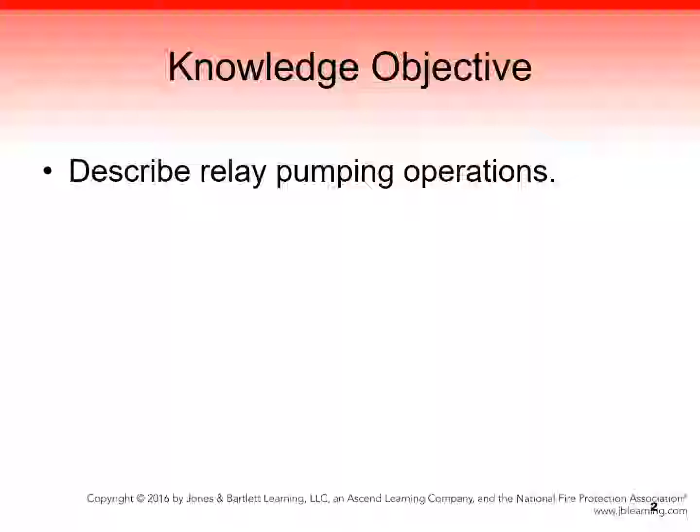The knowledge objective that we're going to cover in this class is to describe relay pumping operations.

Establishing an uninterrupted water supply is one of the most important objectives for any incident commander, or IC. In areas where municipal water supplies are not readily available or static water supplies are not available close to the incident, the IC must establish a plan to obtain an uninterrupted water supply. This can be obtained through a relay pumping operation, a tanker shuttle, or a nurse tanker operation. Again, as mentioned earlier, these operations can be labor and equipment intensive. Appointing a water supply officer to oversee them will ease the burden on the IC.

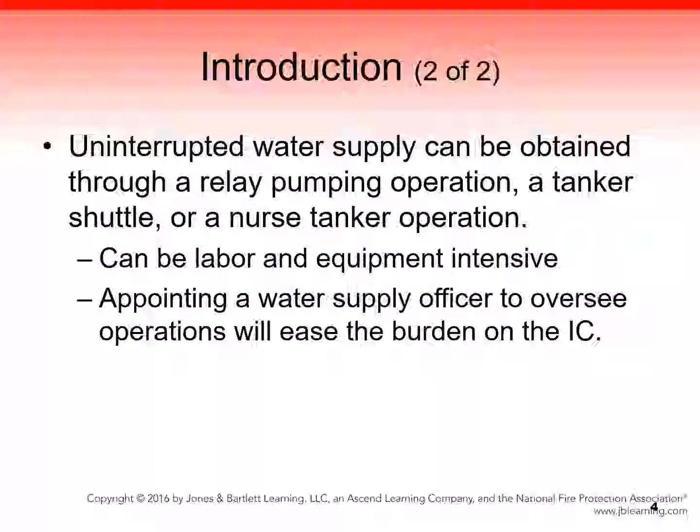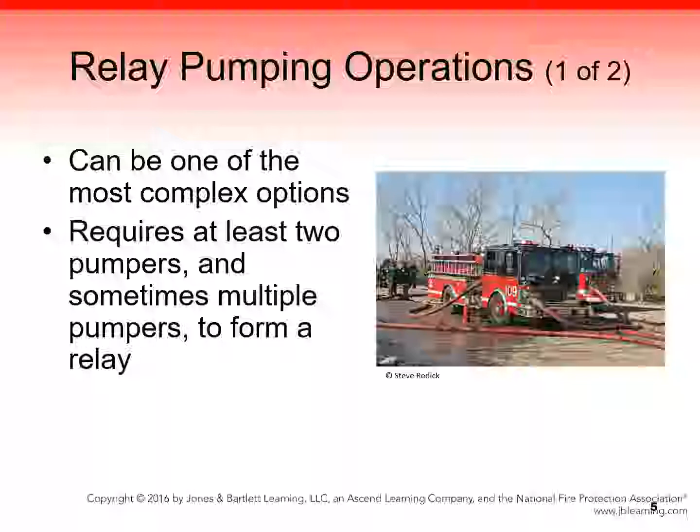A relay pumping operation can be one of the most complex of these options because it requires at least two pumpers, and sometimes multiple pumpers, to form a relay system, as shown in figure 13-1 in your text. Water is pumped from a water source, hydrant or static, through hose under pressure to the apparatus engaged in fire suppression efforts. Relay operations can be as simple as one fire pumper at a pond or lake and the other fire pumper at the fire scene, or as complex as the use of multiple pumpers to supply water over long distances to a fire operation.

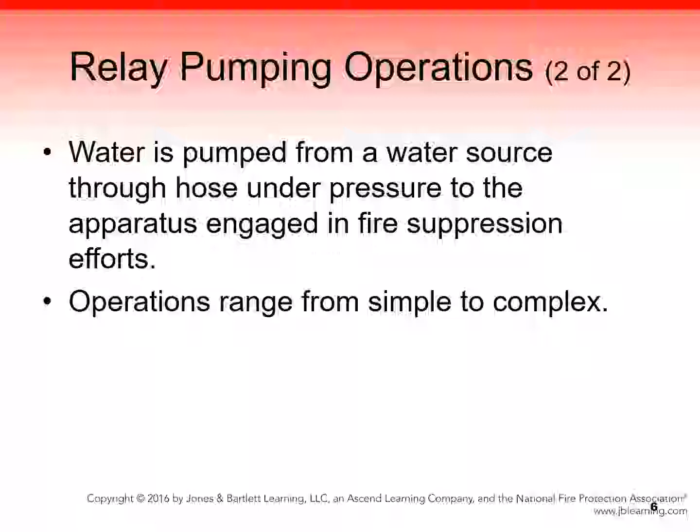Let's discuss the components of a relay pumping operation. To establish any type of relay, you must have a minimum of 2 fire pumpers, hose lines, and personnel. One fire pumper is located at a water source; this is called the source pumper. The other fire pumper is positioned at the fire scene, and this is called the attack pumper. Any other fire pumpers positioned between these two apparatus to maintain flow pressure in the relay system are called relay pumpers.

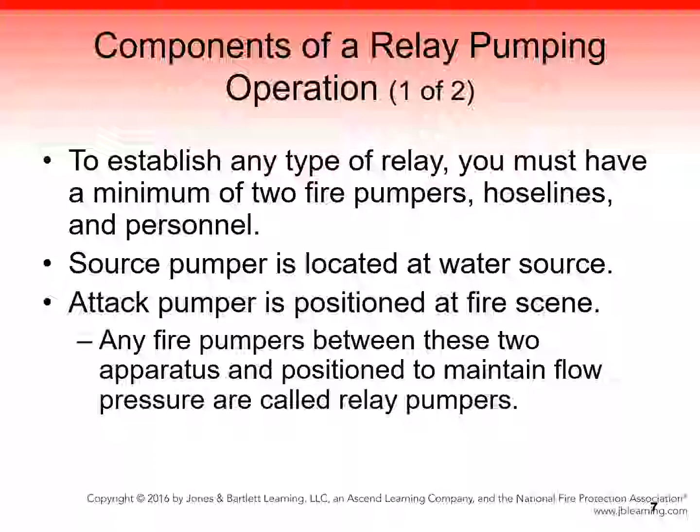2 medium-size or large diameter hose lines are used to supply water in this scenario. Relay pumping operations will demand the use of personnel as they are being established, especially at the source pumper. Once the relay is established, generally the only crew member who needs to remain with the fire apparatus is the driver-operator, as long as the area around the fire apparatus is safe from traffic flow. If it is not, a second member should be left behind to assist the driver-operator. All other crew members should be used as resources if the IC chooses to do so.

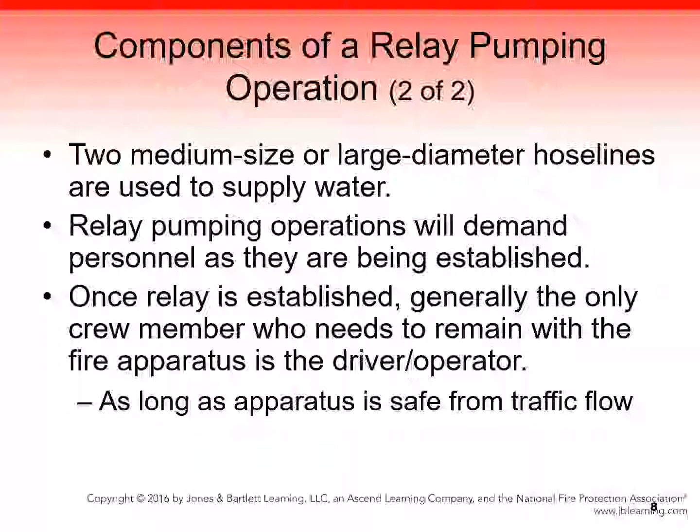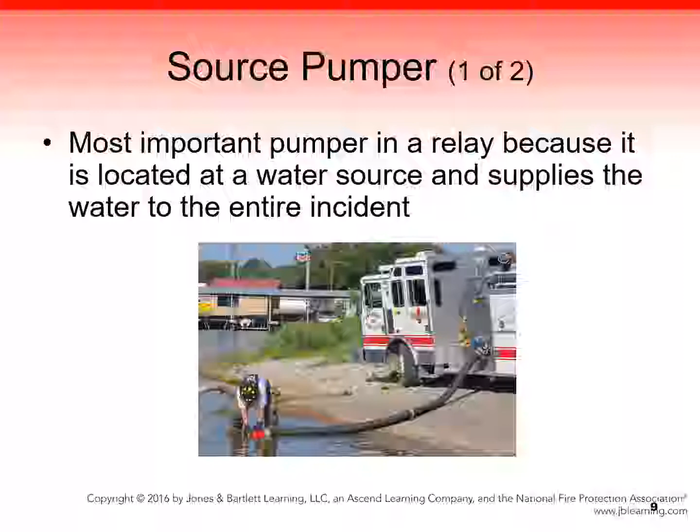The source pumper is the most important pumper in a relay because it is located at the water source and supplies water to the entire fire incident, as shown in figure 13-2. The source of the water is either a fire hydrant or a static water source. The source pumper should consist of the largest fire pump of the units assigned to the relay pumping operation, thereby ensuring that it can provide the maximum amount of water.

For example, if the source pumper has a 1,500 gallon per minute pump, it should be supplying the 1,000 gallon per minute pump on the relay pumper. This setup ensures that the 1,000 gallon per minute pump can be supplied with enough volume of water to meet its capacity if needed. If the reverse were to be true, then the larger pump could not be supplied to capacity because the incoming flow would be less than 1,500 gallons per minute.

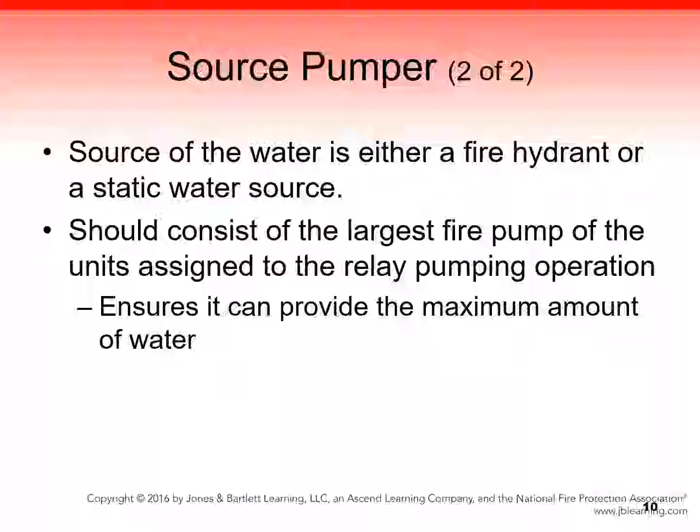The attack pumper is usually the first unit at the scene of an incident. Its operation will dictate how much water will be needed based on how many gallons per minute the fire attack requires. If the attack pumper cannot establish its own water supply, it may lay a dry supply line into the scene to be filled later by a source pumper or a relay pumper, as shown in Figure 13-3.

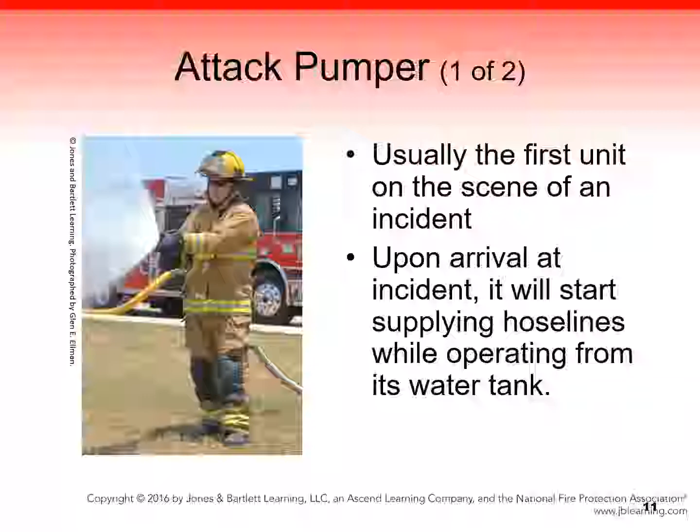If the attack pumper is being positioned in an area that has limited access, it is generally recommended that a supply line be laid down from an open area to the limited access point. Another responding engine should then complete the connection and provide a water supply to the attack pumper. Upon its arrival at the incident, the attack pumper will start supplying hose lines while operating from its water tank.

It will then switch over to the relay supply line when it's ready. This process presents a challenge to both the driver-operator and the IC.

The fire attack is initially limited by the capacity of the attack pumper's water tank. The attack pumper will be able to support additional hose lines only if the incoming water supply from the relay operation will support them. For example, if the relay operation is supplying 300 gallons per minute of water, the attack pumper will be able to provide slightly less than 300 gallons per minute of discharge flow to the hose lines.

The amount of flow available is valuable information for the IC and must be identified so that the IC can make tactical adjustments to the overall strategy until water supply can be improved.

Ultimately, the attack pumper serves as the workhorse at the incident, as it provides water to all of the hose lines that are attacking the fire. If the attack pumper does not have water, then no attack on the fire can take place.

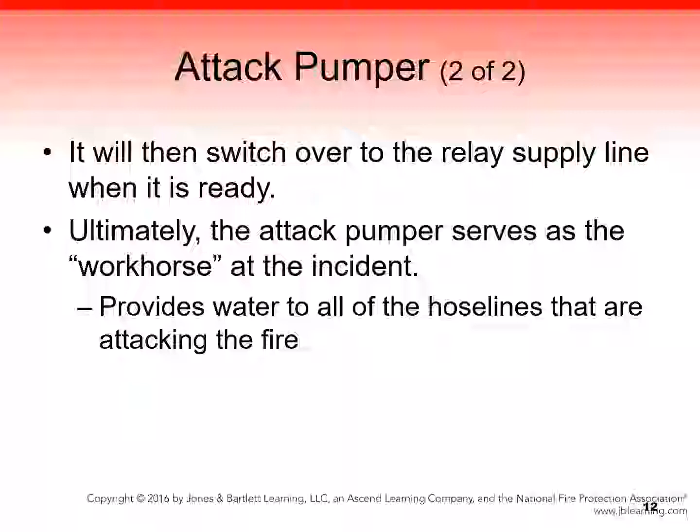Relay pumpers are the fire apparatus that are placed in the middle of the relay pumping operation, as shown in Figure 13-4.

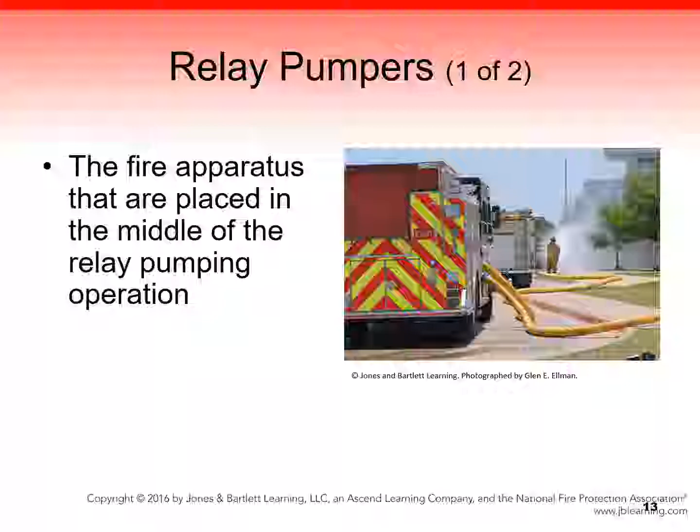They obtain their water from the source pumper and increase the pressure to the next fire pumper in the relay. These pumpers act like booster pumps to maintain pressure throughout the length of the relay. A relay pumper cannot increase the volume of water being pumped. It can only increase the pressure, because the source pumper provides the flow quantity based on the volume being discharged by the attack pumper.

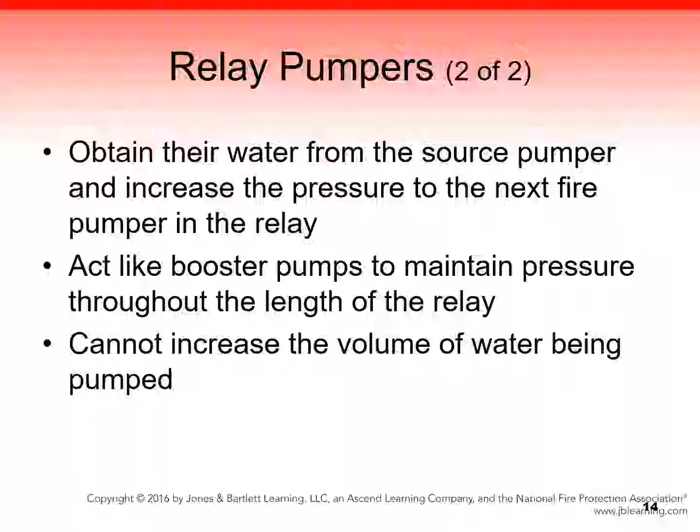For example, if the source pumper is flowing 800 GPM (gallons per minute) at 80 psi, the relay pumper will receive a flow of 800 GPM, but due to friction loss in the hose lines, the water will be at a pressure of only 50 psi. The relay pumper will increase the pressure back to 80 psi and continue to flow at 800 GPM to the next pumper, which will then increase the pressure again to overcome the friction loss until ultimately the 800 GPM flow reaches the attack pumper.

Let's talk about equipment for relay pumping operations. Fire hose is the primary path of travel for water to get from one fire pumper to another in a relay operation. The hose can consist of single large diameter hose, which is 4, 5, or 6 inches in diameter, or multiple medium-sized hoses, which are 2.5 or 3 inches in diameter.

Single lines of LDH, by their design, have a very low friction loss variable: 7 psi when flowing 1,000 gallons per minute in a 5-inch hose line. Compare this to a single 3-inch medium hose line, which has a friction loss variable of 21 psi per 100 feet for just 500 gallons per minute.

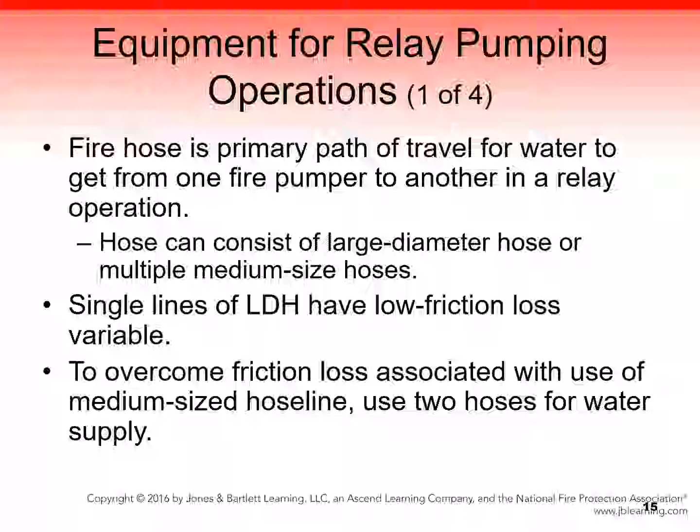To overcome the higher friction loss associated with use of medium-sized hose lines, as I was just discussing, it is recommended to use 2 hoses for a water supply. To avoid this issue altogether, it is highly recommended that LDH be used whenever possible.

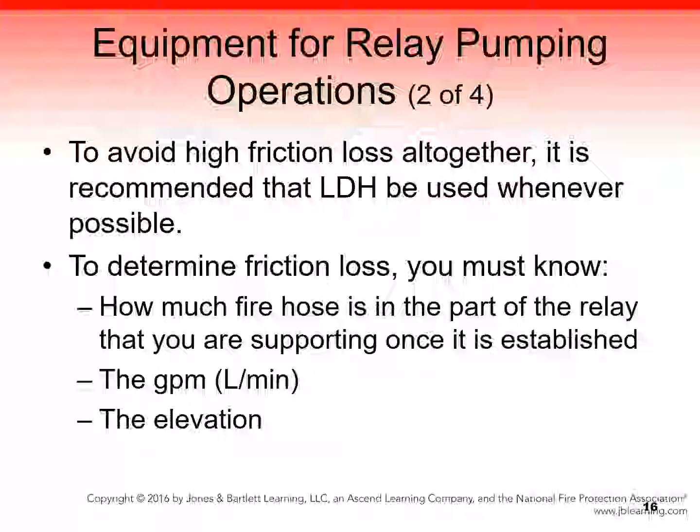To determine the friction loss for a relay pumping operation, you must know: A, how much fire hose is in the part of the relay that you are supporting once it is established; B, the gallons per minute; and C, the elevation. You can then calculate the friction loss for your part of the relay operation and adjust your discharge pressure accordingly.

Relay pumping operations may require some other standard equipment, such as hose adapters to connect hoses with different types of threads, a Siamese hose which merges two medium-sized hose lines into a single LDH, a manifold which splits a single LDH into 2 or 3 medium-sized hose lines, and reducers which connect larger single hose lines with smaller single hose lines.

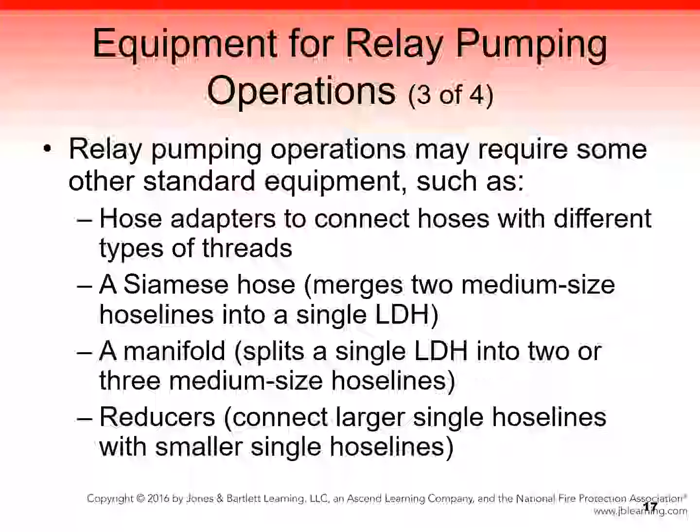No matter which size hose you're using to supply water from the source pumper, each pumper in the relay operation and the attack pumper must be equipped with an intake relief valve. Most modern pumpers are equipped with these valves at the time they are built. Older pumpers may need to be retrofitted with external valves.

An intake relief valve will prevent the incoming water supply from reaching excessively high pressure, which might damage the pump and possibly interrupt the relay operation. Relief valves discharge the excessive pressure through a port located on the valve.

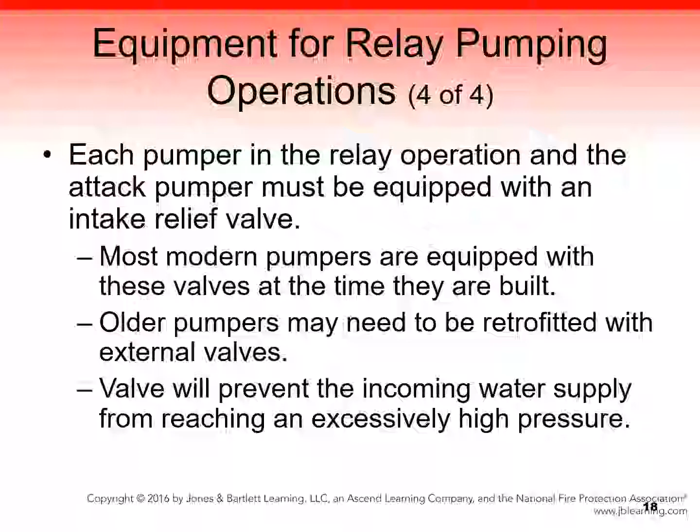Personnel for relay pumping operations is what we're going to discuss now. A safe relay pumping operation requires that you have adequate personnel for the operation. A minimum of 2 crew members should be assigned to each fire pumper if the pumper will be exposed to moving traffic and other hazards around the fire apparatus.

As the driver-operator, it is your responsibility to operate the pump and manage the intake and discharge pressures. The second firefighter is responsible for managing the area around the fire apparatus so as to ensure the safety of the members by monitoring vehicle movement around the fire pumper and warning you of possible dangers.

Let's discuss preparing for a relay pumping operation. The length of a relay pumping operation is primarily determined by the distance between the water source and the incident. The amount of water required by the attack pumper and the size of the supply line can also affect whether a relay pumper is required and, if so, how many of these apparatus are needed.

As discussed earlier, small diameter supply hose lines decrease the flow capacity and increase the friction loss. Generally, LDH represents the best option for relay pumping operations, as we discussed earlier as well. Given that supply hose is critical for successful relay pumping operation, it must be in place before water can be flowed.

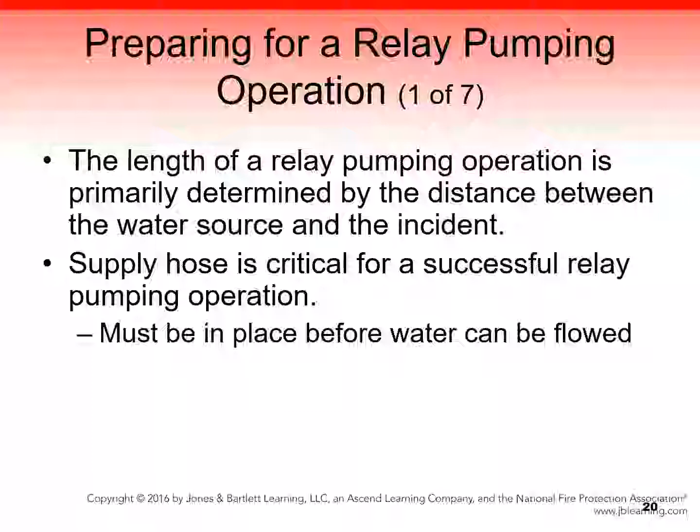A forward lay is a supply hose line that is brought to the scene by a fire pumper from the water source, as shown in Figure 13-5. An engine that connects to a fire hydrant and then proceeds to the fire scene is an example of a forward lay.

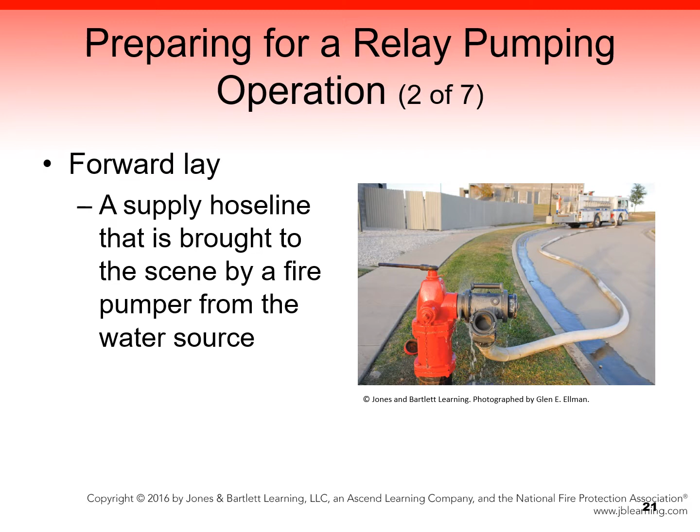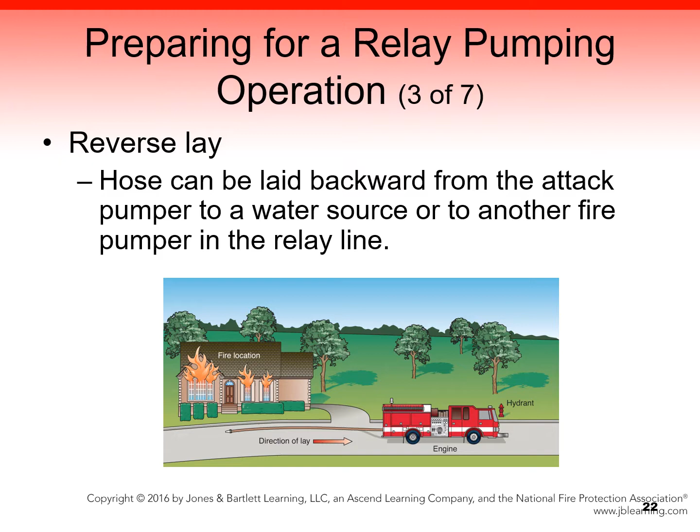Hose can also be laid backward from the attack pumper to a water source or to another fire pumper in the relay line. Both of these are examples of a reverse lay technique, and this is shown here on your video and in Figure 13-6 in your text.

Alternatively, one fire pumper may lay hose into the scene while another fire pumper lays hose out from the first engine's coupling to the water source. This approach is called a split lay and is shown in Figure 13-7.

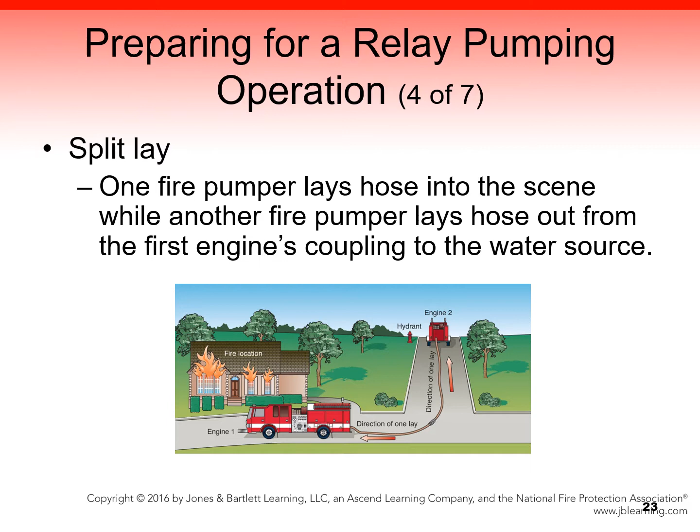Another type of split lay involves laying a line from an open area to the pumper where there is limited access and having a second pumper connect that hose and move to the water source.

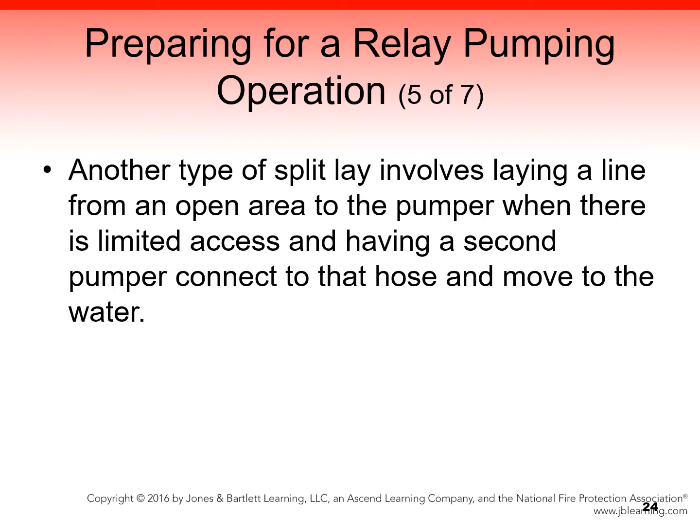Once you have the hose in place for the relay, you can determine whether a relay pumper is needed by calculating the amount of friction loss for the length of the hose in the hose lay. If the discharge pressure will exceed 80 psi for LDH or 175 psi for medium-sized hoses, a relay pumper is needed to boost the water pressure.

Although a good rule of thumb is that no relay operation should extend for more than 800 feet, it can be longer as long as you keep adding pumpers. Maintaining relay operations over a shorter distance will keep the pump discharge pressure manageable while ensuring the proper quantity of water flows to the attack pumper. Keep in mind that the attack pumper's needs are the deciding factor in terms of the pressure and flow necessary.

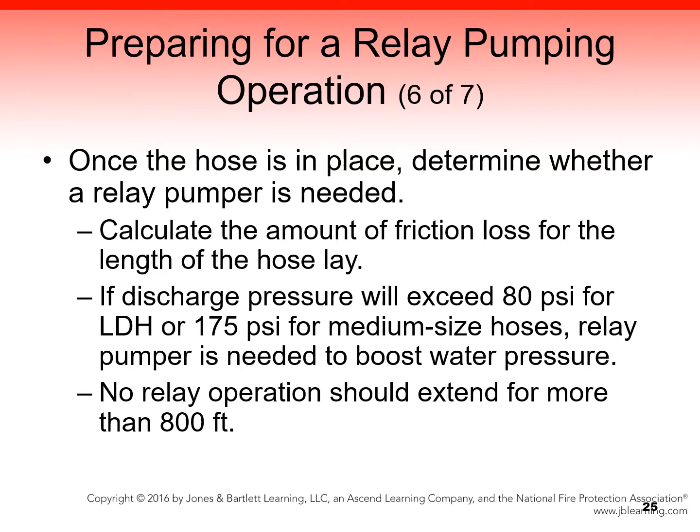Adapters, reducers, manifolds, and appliances may also be used in relay pumping operations. When two fire pumpers use different threads on their couplings for hose, adapters allow for both pumpers to connect to the same hose. When the size of the hose lines differ, reducers are needed to connect the mismatched lines together.

Manifolds greatly increase the effectiveness of relays by allowing one LDH to supply two to four medium-sized hose lines with water. When an LDH is split into multiple hose lines in this way, however, the overall friction loss increases due to the compression of the water back into smaller vessels, in addition to the flow restrictions within the appliance itself.

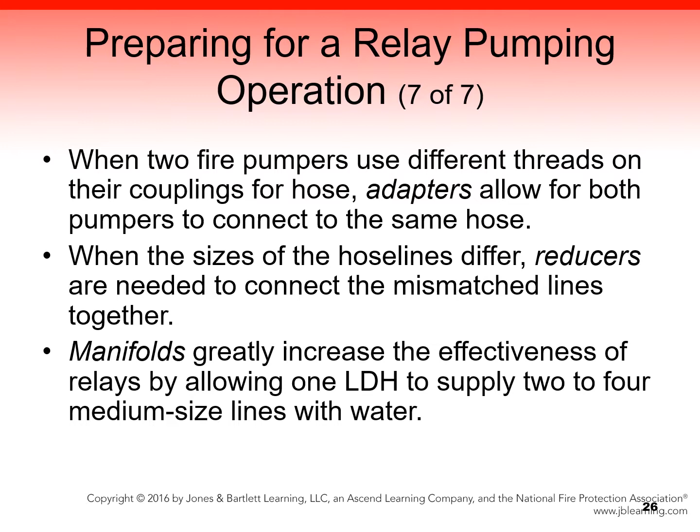An appliance is any other component that you can flow water through. The Siamese hose and manifold are examples of appliances that, when used in a relay pumping operation, must be taken into account when calculating the friction loss.

Now let's discuss calculating friction loss. As stated earlier, the attack pumper's needs drive the relay pumping operation. For this reason, the attack pumper's driver operator must communicate to the source pumper's driver operator how much water in gallons per minute is flowing now or is planned to flow.

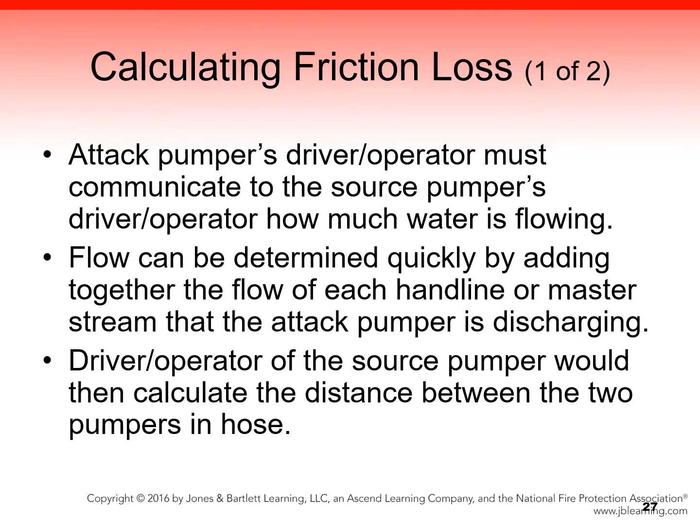The attack pumper driver operator can determine his or her flow quickly by adding together the flow of each handline or master stream that the attack pumper is discharging. For example, if the attack pumper were flowing at 500 gallons per minute from 3 hand lines, the driver operator would communicate to the source pumper that he or she needs 500 gallons per minute. The driver operator of the source pumper would then calculate the distance between the two pumpers in hose.

For this example, assume that two lines of 3-inch hose are laid out over 400 feet. To calculate the friction loss, you would divide the flow in gallons per minute by the number of hose lines being used, 2 lines in this case. Each line will flow half of the water required. 500 gallons per minute divided by 2 equals 250 gallons per minute.

A 3-inch hose line at that flow has a friction loss factor of 6 psi per 100 feet, which is multiplied times the number of feet in hundreds, 4 in this example, which gives a total friction loss of 24 psi. Once you have calculated the friction loss, you would add 20 psi for residual pressure to prevent cavitation, for a total discharge pressure of 44 psi.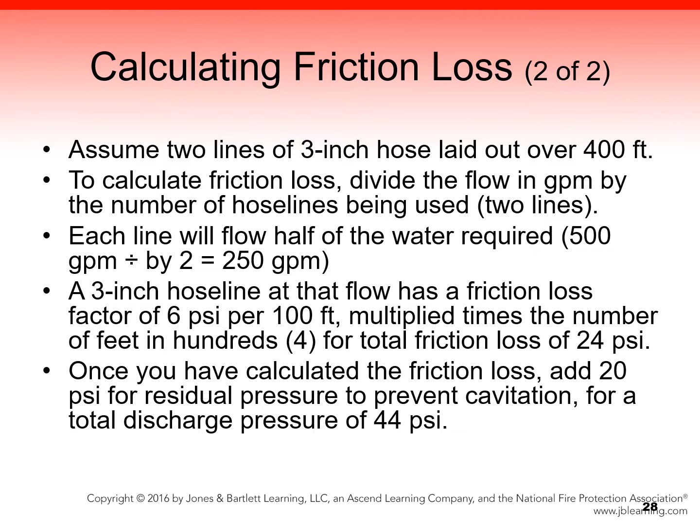One type of relay pumping operation is called a calculated flow relay. It requires that the driver operator of the source pumper obtains from the attack pumper the flow required for fire operations. The driver operator must then calculate the friction loss for each hose layout in the relay and add 20 psi for residual pressure at the attack pumper. This type of relay is the most common. It uses actual flow calculations to determine the quantity of water required.

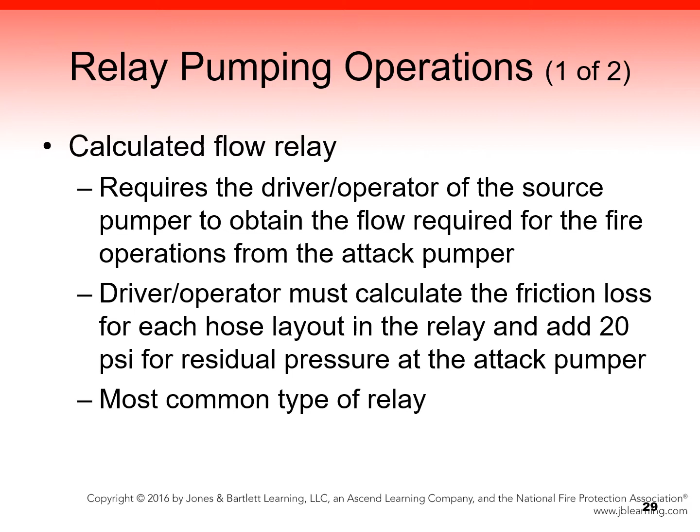Many fire departments have standardized the supply pressures they use for constant pressure relays based on prior experience. The pumper driver operator in this type of relay sets the pump discharge pressure to 175 or 80 psi, depending on the size of the supply line, and maintains this pressure for the duration of the relay pumping operation. Setting the pressure relief valves or pressure governor will maintain the desired pressure in the event of any changes at the attack pumper and will prevent overpressurizing of hose lines or damage to the pump.

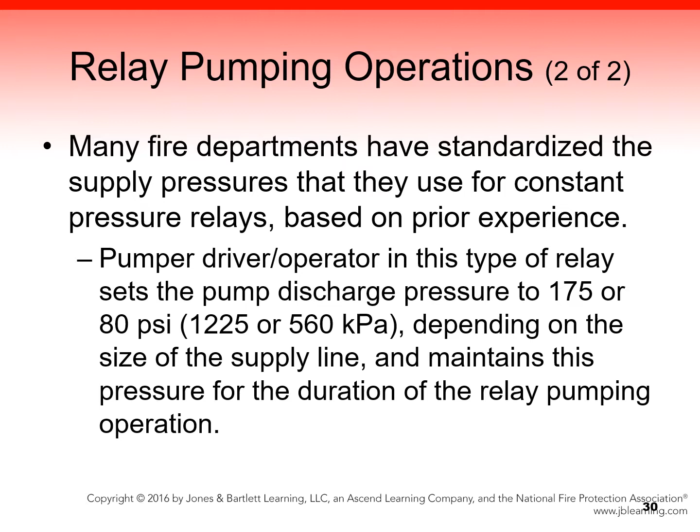The relay pumping operation starts at the source pumper and is where the largest fire pump should be located. The hose between the pumpers should be placed through either a forward, reverse, or split hose lay. LDH provides the highest efficiency for relay pumping operation.

Once at the water source, the source pumper begins a drafting operation from a static water source or connects to a fire hydrant. Make sure to see the Drafting from a Static Water Source skill drill in this chapter, which is titled Drafting and Water Source Operations.

When setting up a source pumper at a static water source, consider the maximum amount of water available for the operation. Once you've established the draft and water is flowing through the dump line, connect the hose lines to be supplied and notify the receiving driver operator that you are ready to start flowing water.

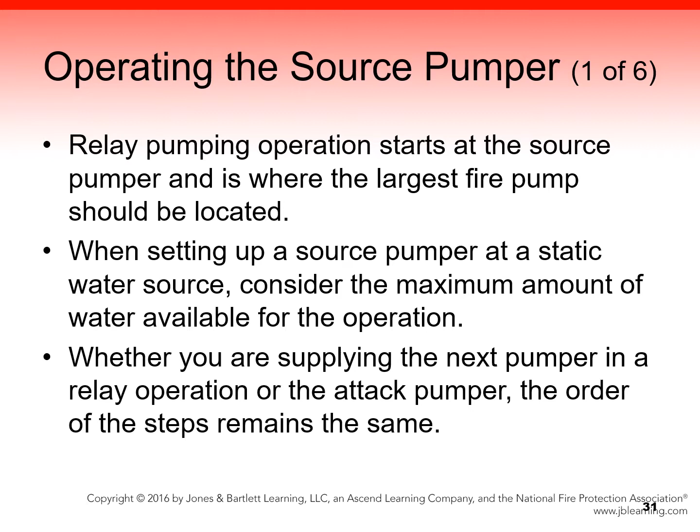Whether you are supplying the next pumper in a relay operation or the attack pumper, the order of the steps remains the same. Open the corresponding discharge valve and slowly begin flowing water while simultaneously advancing the throttle as you are opening the discharge valve. You do not want to lose the draft of the pump, i.e., interfere with the pump's vacuum strength, by flowing more water out than is being supplied to the pump.

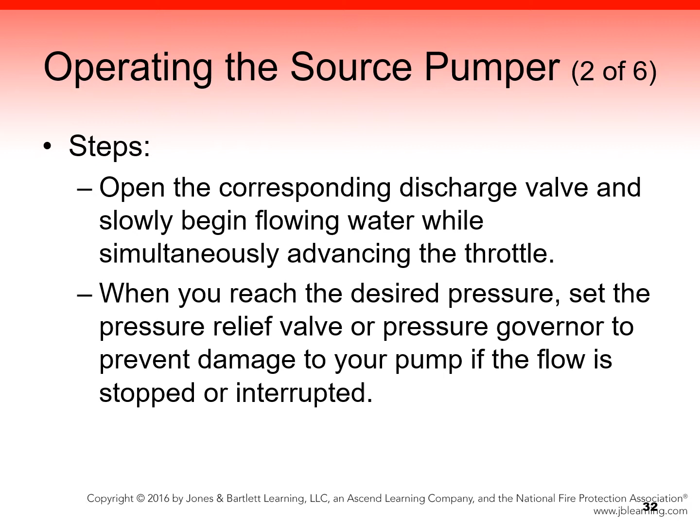When you reach the desired pressure, set the pressure relief valve or the pressure governor to prevent damage to your pump if the flow is stopped or interrupted by a relay pumper or the attack pumper.

Establishing a relay pumping operation from a hydrant works in the same way as using a hydrant as a source of water to your own supply. The only difference is that you are supplying another pumper and not the hand lines attacking the fire itself.

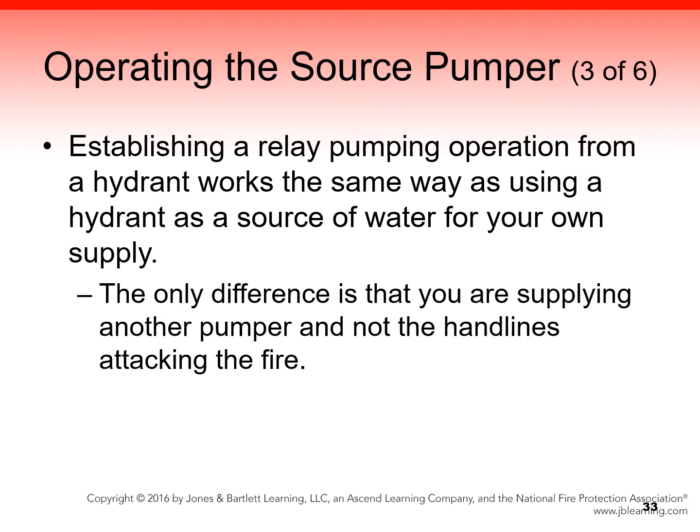Select a suitable hydrant that is as close to the incident site as possible. Make sure to flush the hydrant before connecting it with a soft suction supply hose line or LDH. If neither of these types of hose is available, you can connect to the hydrant using two medium-sized hose lines to establish a water supply.

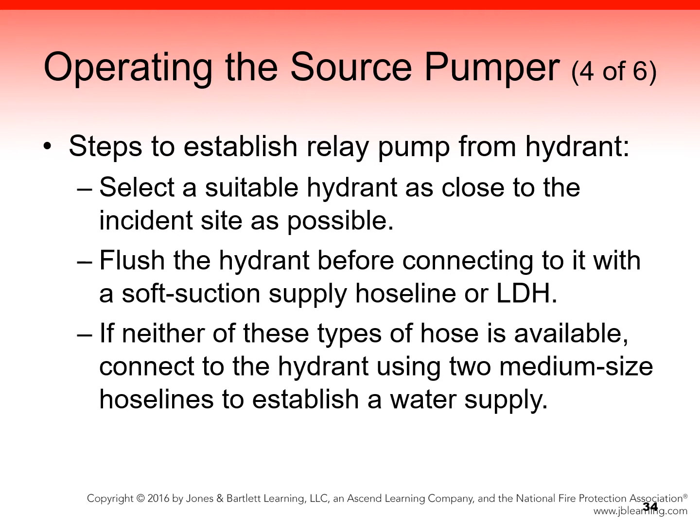Contact the receiving driver operator to notify him or her that you are ready to start supplying water. If the next pumper is not ready, wait until it is set up before you begin to flow the water. If you are supplying the attack pumper, advise the driver operator you're ready to begin the flow, and the attack pumper crew will then tell you when to send the water.

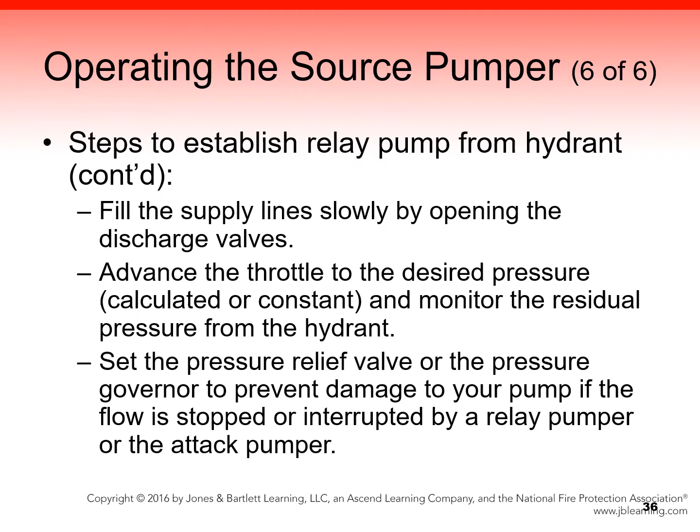Fill the supply lines slowly by opening the discharge valves. Advance the throttle to the desired pressure, calculated or constant, and monitor the residual pressure from the hydrant. Set the pressure relief valve or pressure governor to prevent damage to your pump if the flow is stopped or interrupted by a relay pumper or the attack pumper.

Now let's talk about operating the attack pumper. The attack pumper is generally the first pumping apparatus to arrive on the scene of a fire. It establishes the hose lines that attack the fire. For example, two 1 3/4 inch hose lines flowing at 100 GPM each require a total water flow of 200 GPM from the pumper. If you start and continue flowing water from the tank of the fire pumper until the relay operation is set up, you will have to monitor your tank level closely to ensure that interior fire crews do not run out of water.

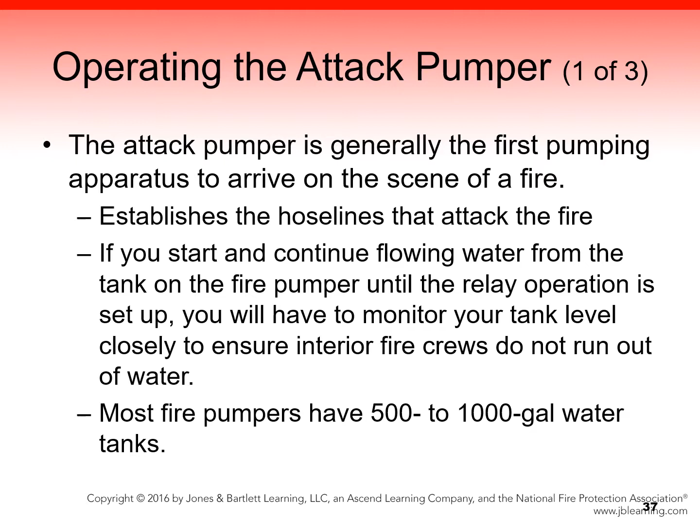Most fire pumpers have 500 to 1,000 gallon water tanks. These allow them to supply the two 1 3/4 inch hose lines for 2.5 to 5 minutes before running out of water.

Getting the water from the source pumper, whether directly or through a relay, is critical to continued operations and firefighter safety.

Once the supply lines are charged, bleed off the air in the hose line from the bleeder valve located at the pumper's intake valve until a steady stream of water comes out of the bleeder. This is shown in Figure 13-8. This air is present as a result of the hose being filled with water. The water displaces this air as it flows through the hose, with the air being forced to the end of the line. So it's always a good practice to bleed your supply lines, because this action prevents air from entering the pump and causing it to cavitate.

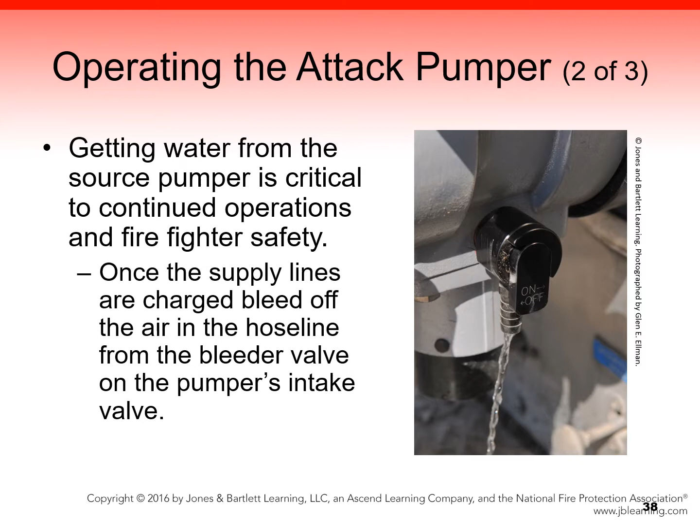The longer the hose length, the more air will be displaced. Slowly open the intake valve while backing down the throttle until the intake valve for the supply line is fully open. The pressure from the incoming water supply will increase the discharge pressure to the hose lines unless you decrease the throttle rate. The tank-to-pump valve should then be closed in older apparatus, but can remain open in newer pumps because of a check valve.

Then slowly open the tank fill valve. This action will prevent the pump from creating a vacuum in the tank and drawing air into the pump through the open valve into a tank containing little or no water. Open the tank fill valve to only a slight extent. Creating too large an opening will take away most of the incoming pressure so that the hand lines will not receive the required pressure and flow. Fill the tank on the attack pumper, and then when it is full, close the tank fill valve.

From this point forward, the attack pumper will be running solely off of the relay or source pumper or pumpers. Advise the source pumper of how much water you need and indicate whether the incoming pressure is sufficient to maintain at least 20 psi of residual pressure.

If you need more flow, contact the personnel providing the supply quickly to communicate your needs. Do not try to flow more water than the source pumper is supplying, as this will cause your own fire pump to cavitate. It is important to notify crews operating those lines of the situation so they can make tactical adjustments or retreat to a safe location until water supply issues are resolved.

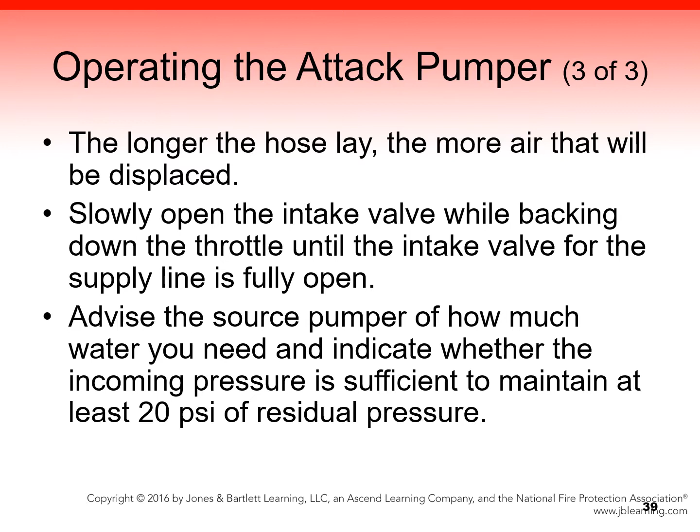Now let's discuss operating the relay pumper. The operation of the relay pumper can be quite simple. All you are doing is laying out hose between the next pumper and your location, then supplying the required pressure and volume to the next pumper in line or to the attack pumper.

A relay pumper will receive its supply from the source pumper or another relay pumper depending on the distance between the water source and the attack pumper. If you participate in establishing the relay operation, you will need to provide hose to the receiving pumper, another relay pumper, or the attack pumper through a forward, reverse, or split hose lay. Remember that LDH is the most efficient choice of hose for relay pumping operations.

You will need to calculate the friction loss for the supply hose based on the flow rate to be supplied, the length of the relay, the size of the hose being used, plus a residual pressure of 20 psi. Once the hose is in place, the source pumper will contact you to advise that water flow is ready to start.

A relay pumper is considered ready when the supply hose to the pumper and the discharge hose to the next pumper are connected. When the water fills the supply hose, you should bleed off the air in the hose line from the bleeder valve located on your pumper's intake valve until a steady stream of water comes out of the bleeder. Remember, your supply line will contain more air if the hose lay is long.

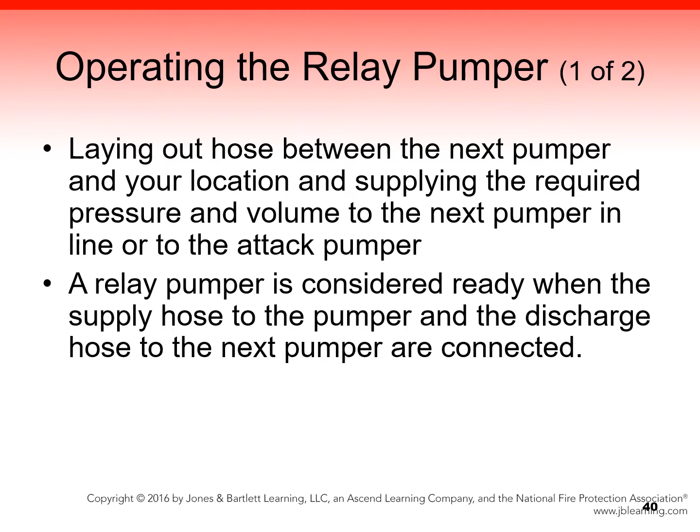Monitor the incoming residual pressure from either the source pumper or another relay pumper. Your goal is to maintain 20 psi of residual pressure. To increase the residual pressure, you can either contact the source pumper to request an increase in pressure or decrease your own flow pressure, which may negatively affect the line supplied by the attack pumper.

If the flow or pressure to the attack pumper is ever affected, you must communicate that fact to the driver operator of the source pumper immediately. This is really important. If the flow or pressure to the attack pumper is ever affected, you must communicate that fact to the driver operator of the source pumper immediately.

Once the flow is stabilized, set the pressure relief valve or the pressure governor to prevent damage to the fire pump if the flow is stopped or interrupted by either the supply or discharge side of the pump. Remember that you are part of a relay operation and therefore are affected by the actions of others supplying your pumper or those receiving your supply.

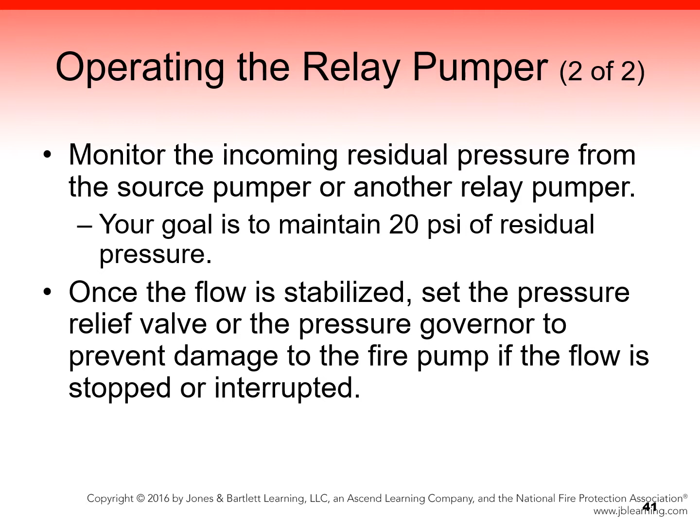Depending on the nature of the relay pumping operation, the last pumper in the series may supply 2 attack pumpers. If this is the case, then the last pumper may use a manifold. That is, one LDH that is split into 4 or 5 medium-sized hose lines that provide water supply for multiple attack pumpers, and this is shown in Figure 13-9.

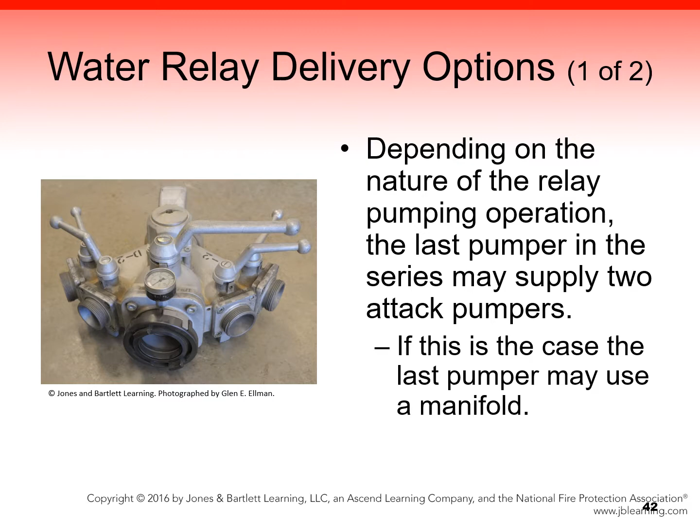To use the manifold as one option in a relay pumping operation, the last relay pumper would provide a supply line to the manifold via the LDH from a discharge port. If 2 attack pumpers are being used at different locations within the incident, each can be supplied with 2 medium-sized hose lines through the manifold.

Once the medium-sized hose lines have been attached, contact the attack pumpers to advise them that you are ready to flow water. At that point, the valves on the manifold can be opened to start the flow of water. The pumper supplying the manifold will need to account for the additional friction loss of the appliance plus the residual pressure for the attack pumpers to maintain the correct pump discharge pressure.

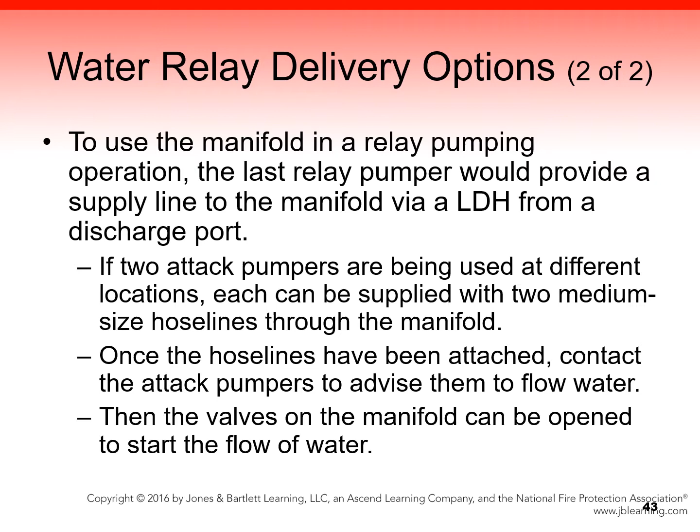Let's talk about joining an existing relay pumping operation. Most relay pumping operations are completely set up at the beginning of the incident because adding a pumper to an existing relay operation usually requires that the flow of water be stopped. Depending on the size of the relay pumping operation, this step can involve a number of pumpers.

If you are called to assist with a relay pumping operation and your fire apparatus is not part of the initial setup of the relay, then you need to be able to hook up your pumper to the hose lines that are already in use.

Pumpers that are generally added to an existing relay pumping operation occur when there's not enough pressure or flow to meet the demands of the attack pumper at the scene.

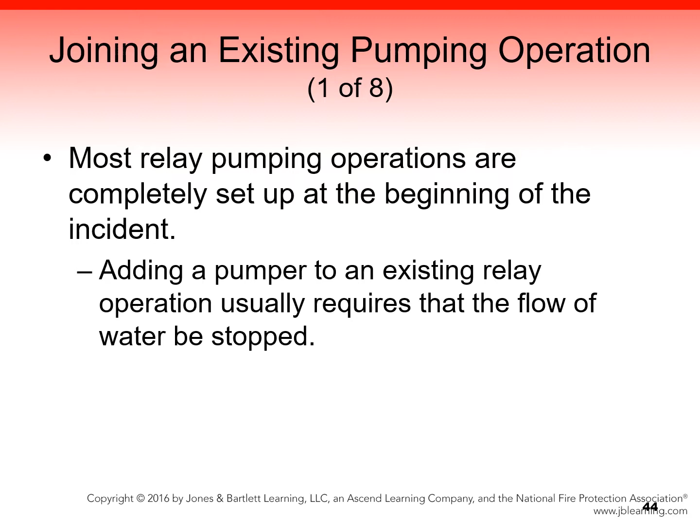Many fire departments that regularly use relay pumping operations because of issues related to limited water supply will use a relay valve in long hose lays. This is shown in Figure 13-10.

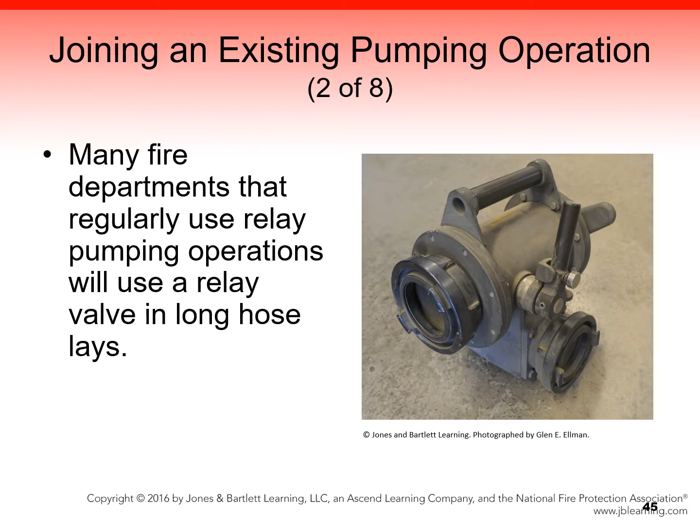A relay valve lets you hook up into the relay without shutting down the entire relay operation. With this approach, you simply hook up both the supply line and the discharge to your fire apparatus before opening this relay valve, as shown in Figure 13-11.

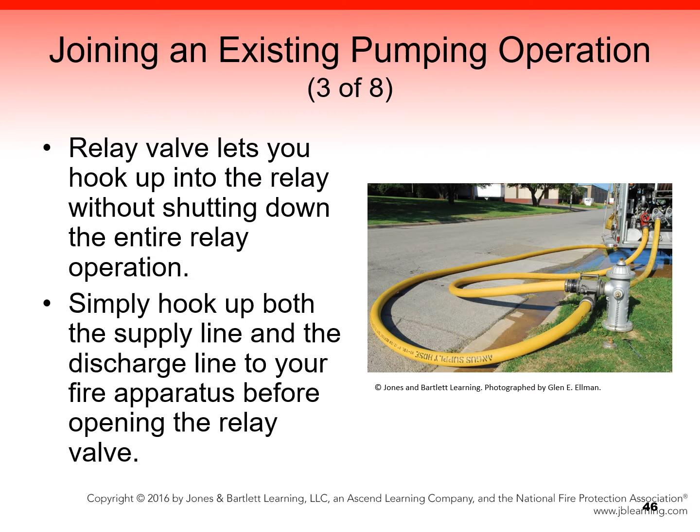Slowly open your intake valve on your fire apparatus to obtain a water supply. Once the valve is completely open, slowly open the discharge valve from your pump to the hose line that is connected to the relay valve. Observe the incoming supply pressure and increase the discharge pressure to provide the GPM and pressure required by the attack pumper.

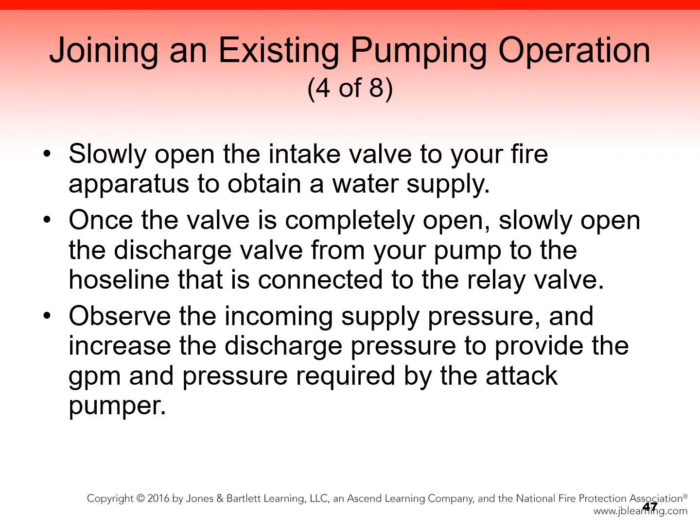Monitor the incoming pressure to maintain 20 psi of residual pressure. Set the pressure relief valve or the pressure governor to prevent damage to your pump if the flow is stopped or interrupted. If a relay valve is not present or has not been used, then the task of hooking into an existing relay operation is more complex.

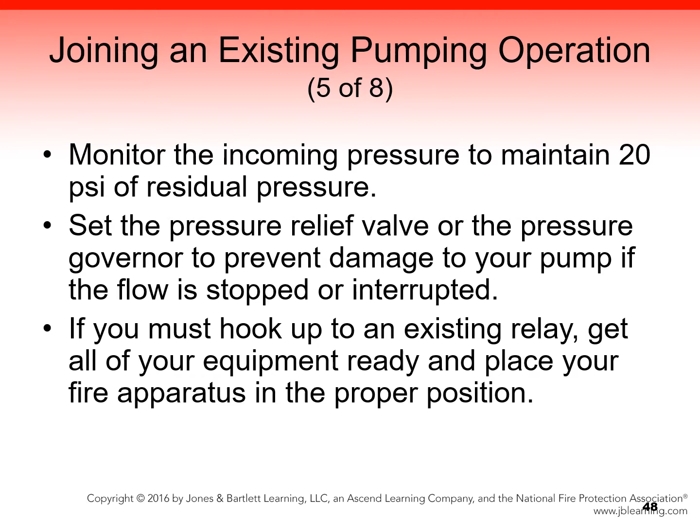If you must hook into an existing relay, get all of your equipment ready and place your fire apparatus in the proper position. Once you have calculated the required discharge pressure based on the length of your hose lay, advise command or the water supply officer and the attack pumper that you are ready to hook into the relay.

The source pumper and any other relay pumpers in the supply line will then shut down their supply lines while the attack pumper switches from the supply line of the relay to tank water.

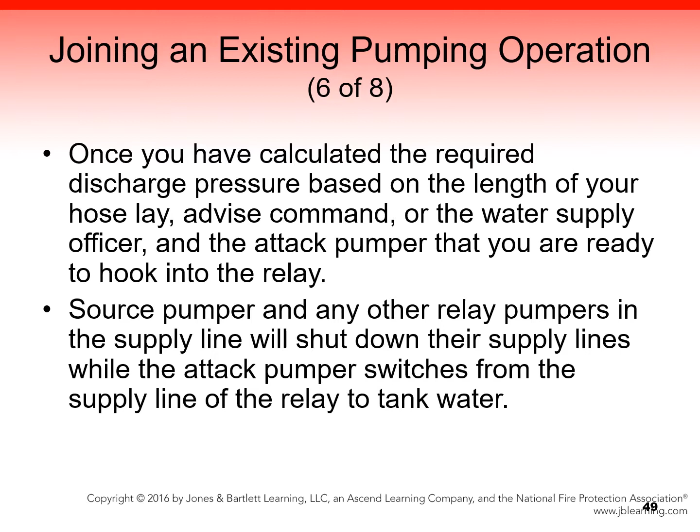Attach the incoming line from the source or other relay pumper to your intake valve first, and then attach the discharge line to the discharge valve.

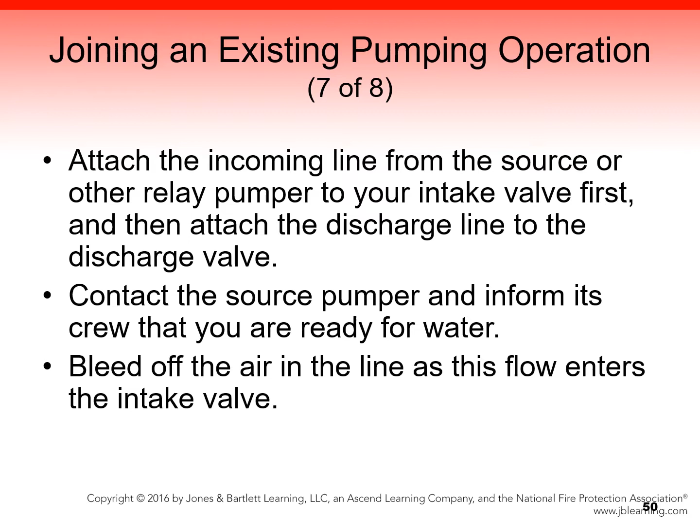Contact the source pumper and inform its crew that you're ready for water, and bleed off the air in the line as this flow enters the intake valve. Contact the next pumper in the relay or the attack pumper to advise its crew that you are flowing water again, and increase the discharge pressure to meet the required GPM and pressure flow.

After you have water flowing, set the relief valve to the pressure needed to prevent any sudden surges.

Now let's talk about pressure fluctuations in a relay pumping operation. The needs and capacity of the attack pumper affect all of the other fire pumpers in the relay operation. The driver operator of the attack pumper determines the GPM needed and notifies the driver operator or operators of the relay and/or source pumpers of its supply requirements.

Unfortunately, should something change suddenly, there may not be time to communicate the need to modify the flow to the operator.

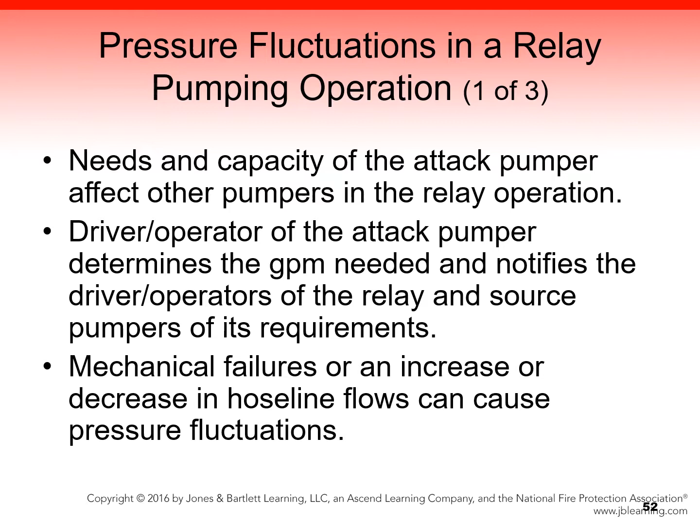Mechanical failures or an increase or decrease in hose line flows, for example, can cause pressure fluctuations. These generally do not have a large effect on the operation and can be handled by the pressure relief valves or the pressure governor. At other times, you must manually adjust pump pressures.

During an operation, if the attack pumper were flowing 500 GPM and a 200 GPM nozzle was shut down, all of the pumpers in the relay would see a sudden increase in pressure. This event should not be a concern unless the pressure fluctuation is greater than 200 psi, which is a magnitude of change that could cause hose line failures or pump damage.

In such a scenario, the driver operator of the attack pumper would need to decrease the pump discharge pressure, and each pumper in the relay would then need to do the same.

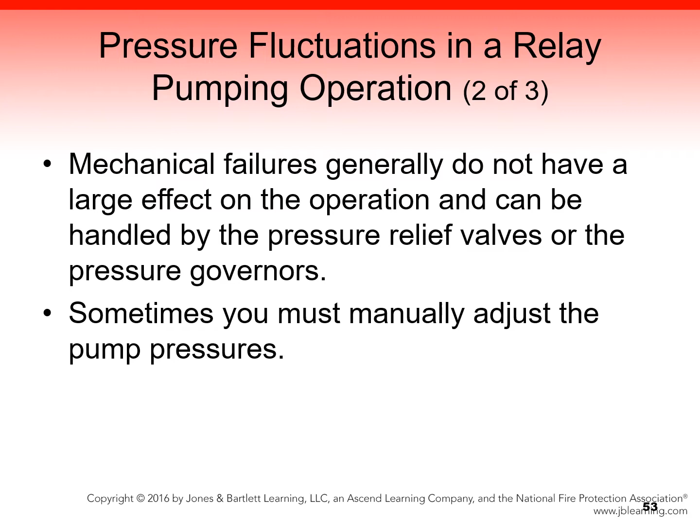Should the attack pumper open an additional line that results in an increase of flow, all pumpers in the relay will need to ensure that their supply lines do not drop below 20 psi residual pressure to avoid pump cavitation, by simply advancing the pump throttle to increase the discharge pressure.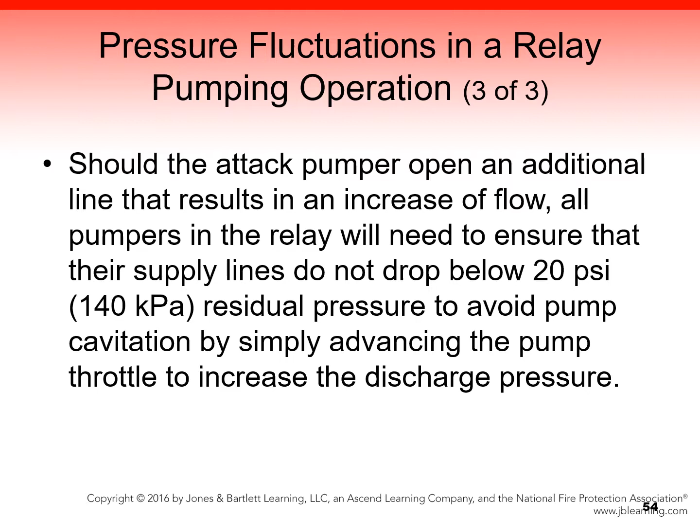Now let's talk about shutting down a relay pumping operation. The order to terminate or shut down a relay pumping operation is given by the IC or water supply officer only after careful consideration. Relays are difficult to establish, and once in place should be maintained as long as necessary.

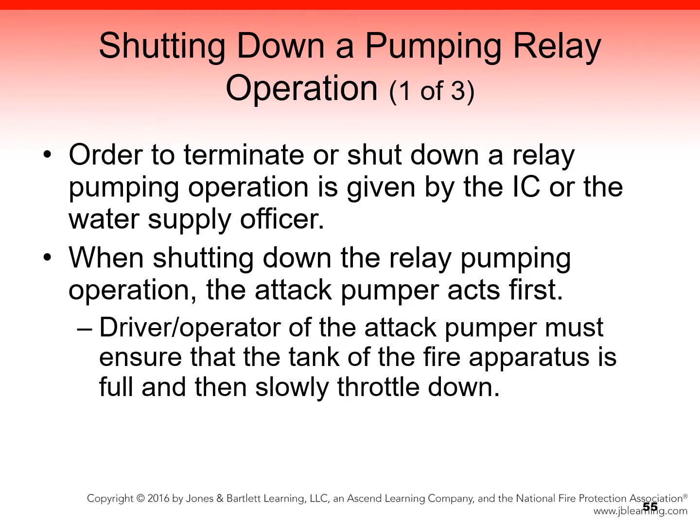Shutting down a relay pump operation is a simple process, but all pumpers participating in the operation must act in a coordinated fashion. When shutting down a relay pumping operation, the attack pumper acts first. The driver operator of the attack pumper must ensure that the tank of the fire apparatus is full and then slowly throttle down.

It is important to keep the hose lines flowing water while you shut down a relay. This prevents fluctuations in water pressure throughout the entire relay pumping operation.

The next pumper in the relay then makes sure that its tank is full and slowly throttles down while still flowing water. This sequence continues until all pumpers have completed this step, ensuring that their tanks are full.

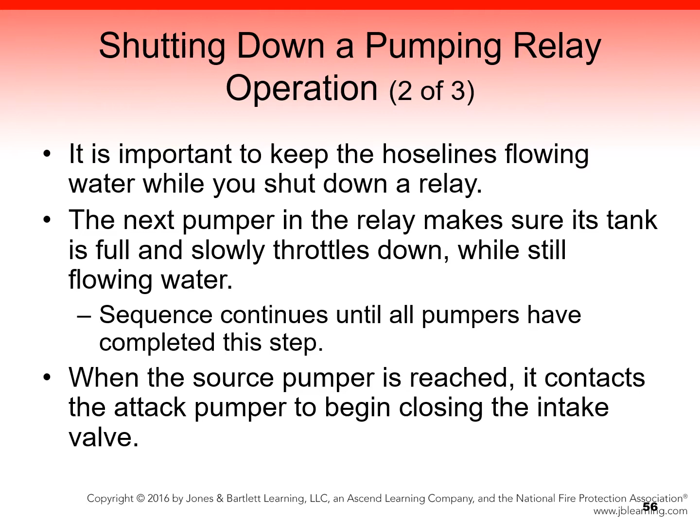When the source pumper is reached, it contacts the attack pumper to begin closing the intake valve. All pumpers in the relay then begin closing the intake valve and discharge lines until all pumpers are no longer flowing water, including the dump line from the source pumper itself.

The hose lines can then be disconnected and drained before being reloaded or rolled up. This systematic approach to terminating a relay pumping operation prevents pump damage by keeping the water flowing at low levels before it is finally shut down completely.

The source pumper can then close the hydrant to stop the flow of water into this pump. Alternatively, if it is providing water from a static water source, simply stopping the flow of water through the pump will break the vacuum and draft of the pump. This action will stop the flow of water through the hard suction hose into the pump.

If that interruption does not occur immediately, disengage the pump, remove a cap from an unused discharge port, and open the valve. This move should allow the water to drain back through the hard suction hose line and back into the static water source. The setup steps are simply reversed.

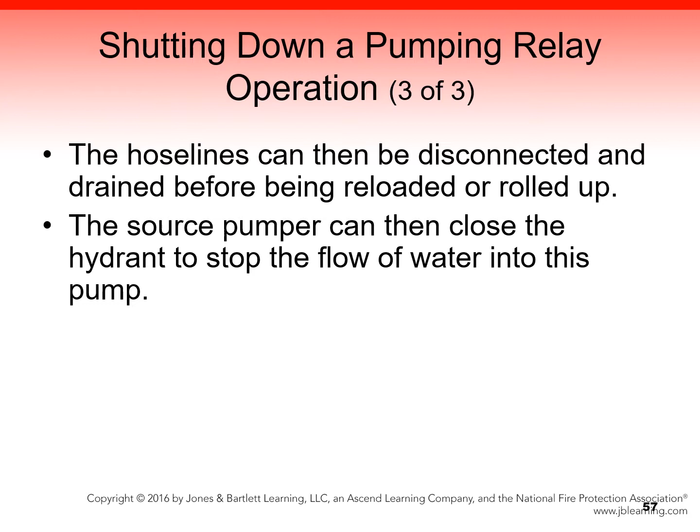All equipment and hoses are placed back into the fire apparatus, and the pumper is ready to return to service.

Let's discuss safety for relay pumping operations. Safety is the utmost concern in any operation, obviously, but it cannot be overlooked when conducting relay pumping operations. It is an understatement to say that water is critical to the success of any firefighting operation.

In areas where an uninterrupted water source is not available and must be established, knowing where and how you will obtain water starts with planning before the incident begins. Identifying large static water sources, dry hydrants, or potential drafting sites before an incident occurs will help improve the efficiency of the incident response.

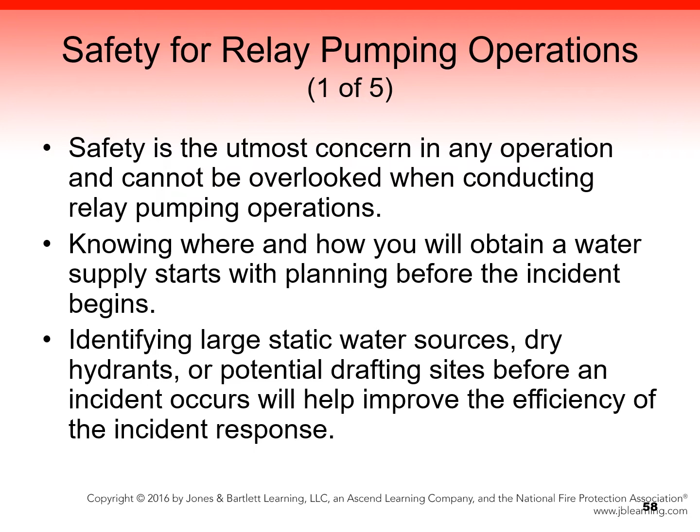Incident safety is improved when crew members have the appropriate training, knowledge of how the equipment works, and practice in using it. For example, which equipment does your company have available? Which appliances are needed for this type of operation? And do your crew members know how to use all of the equipment and appliances?

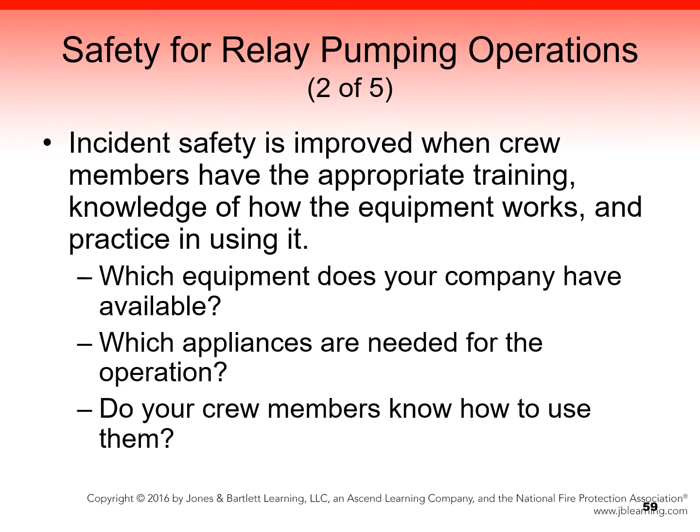Make sure you fully understand the role played by each position within a relay pumping operation and practice those roles regularly. An effective driver operator will know which equipment he or she will need to use to provide water to the scene of a fire through a relay pumping operation.

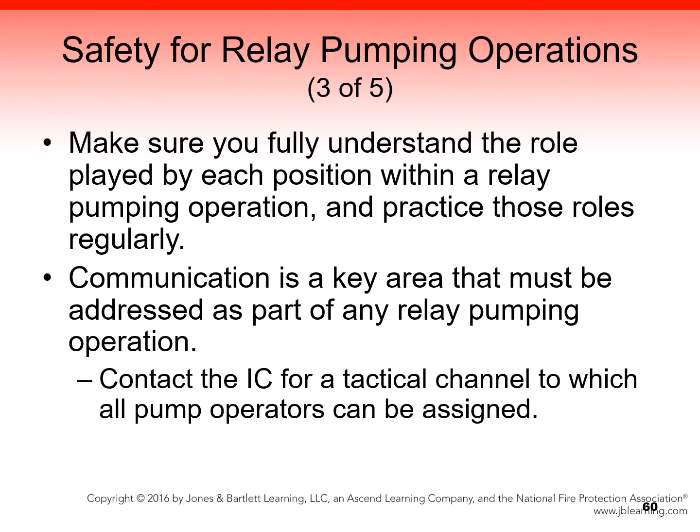Communication is another area that must be addressed as part of any relay pumping operation. Contact the IC for a tactical channel to which all pump operators can be assigned. With this communication setup, all pump operators can talk to one another directly when making requests for additional water or other pressure adjustments, without distracting the fire attack operations personnel who are communicating on the main tactical channel. Constant communication between pump driver operators will help prevent situations that might otherwise cause pump damage.

Fire hose is another source of safety concern during a relay pumping operation. Watch for any signs of damage to or possible trouble with the hose. If a catastrophic failure were to occur in the hose lines of a relay pumping operation, the safety of the firefighters on the hand lines at the fire scene will be compromised.

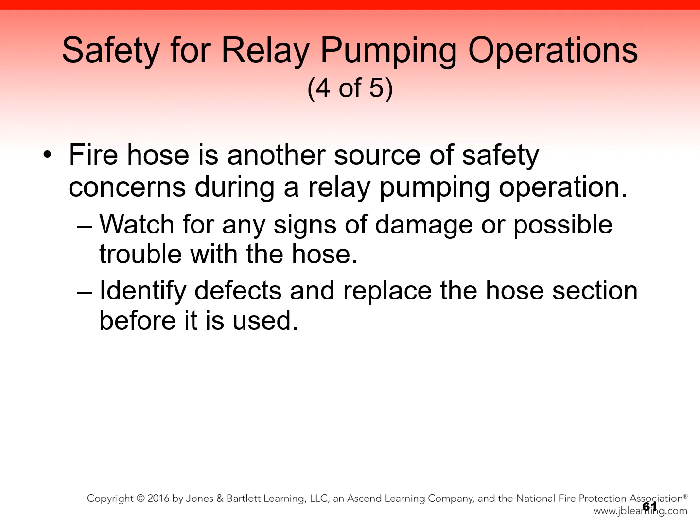If you can identify defects and replace the hose section before it is used, you will save time later and have a safer operation. If you do see a defect after the operation has begun, simply get the replacement hose in place and follow the shutdown procedures used for entering or exiting a relay pumping operation, in which the attack pumper switches to tank water before stopping the flow of water from the relay.

The pump driver operator is at risk for injury if he or she is not wearing some type of protective gear. At a minimum, personnel should wear turnout pants and boots, a helmet, and gloves. This PPE will protect the driver operator's hands, feet, and head from injury caused by falling equipment or catastrophic failure of a hose line.

If crew members will be operating in or around the street and moving traffic, they must wear reflective vests as well, even during daytime operations.

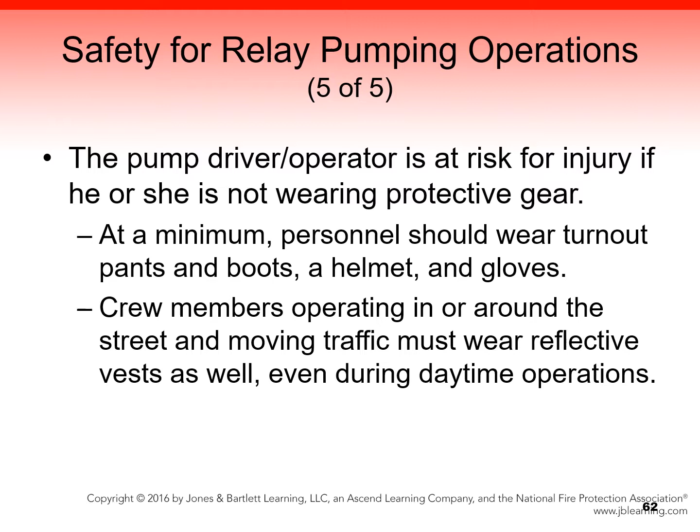In summary, establishing an uninterrupted water supply is one of the most important objectives for any IC. Having a sustainable water supply is a vital part of any fire incident scene. A relay pump operation consists of at least two pumpers, and the source pumper is located at the water source.

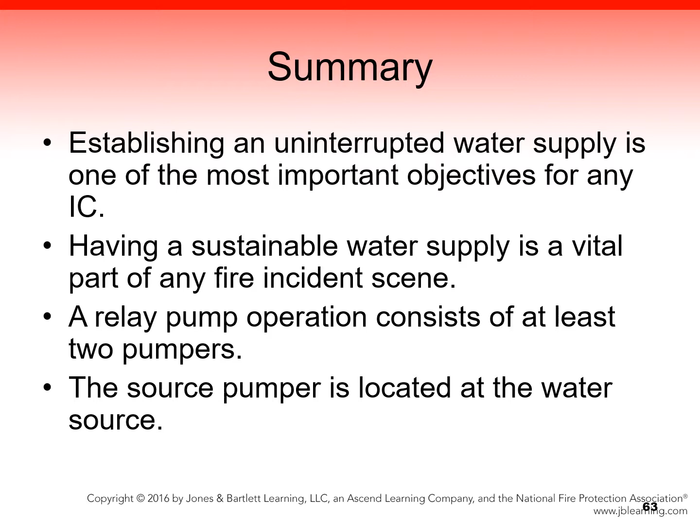The attack pumper is located at the fire scene. The relay pumpers are placed between the source and attack pumpers. A relay pump operation may be completed with LDH or multiple medium-sized hoses. Various hose lays may be used to lay the hose between pumpers.

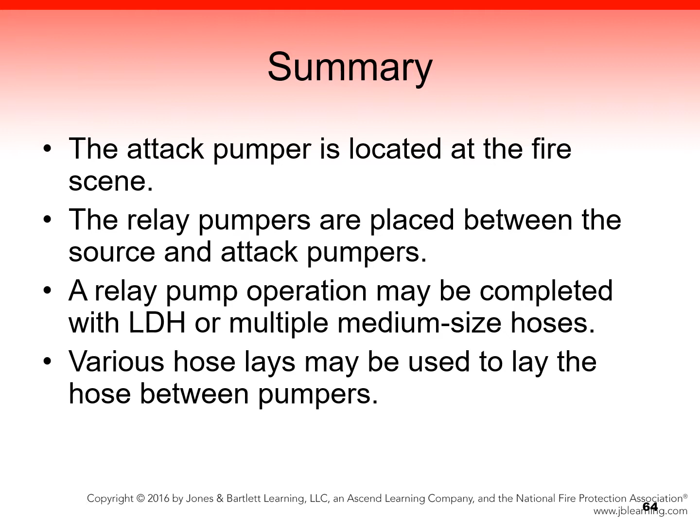Two basic types of hose relay pumping operations are calculated flow and constant pressure relay. Relay valves may be used so that the pumping operation does not have to be shut down when a new pumper hooks into the system. And constant communication between driver operators is necessary for a safe operation.